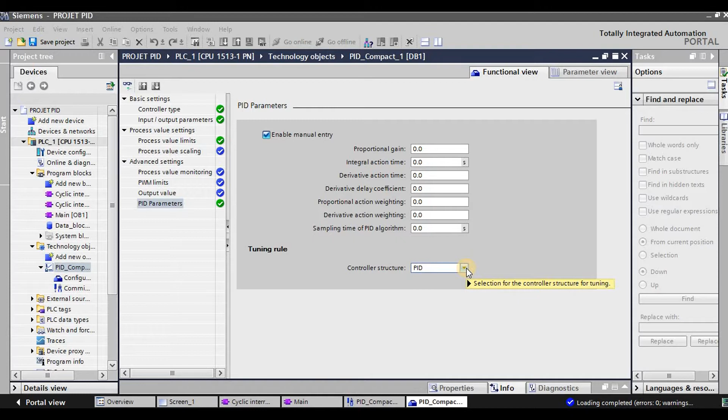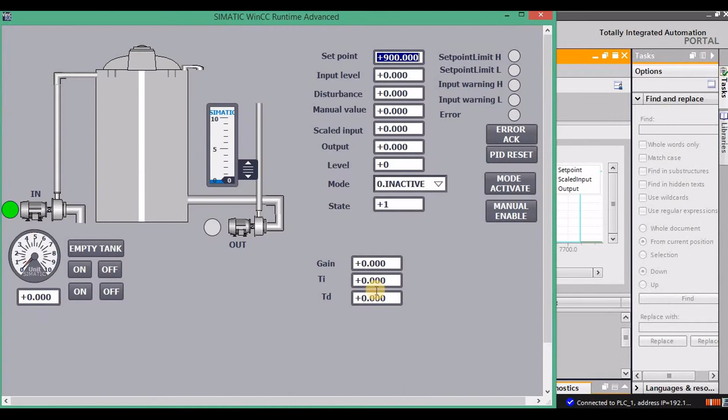Now the pre-tuning has started. Now the pre-tuning has finished. Now we'll check the PID parameters. The gain is 9.4 and TI is 2.4, TD is 0.42.

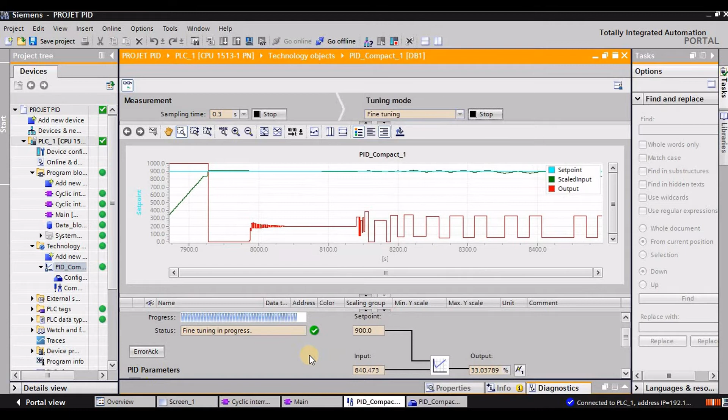Now we will fine tune the system. Now the fine tuning is finished and the status is system tuned. Now we'll check the parameters. Just change it to proportional gain 1 and the integral time 11 and derivative action time 2.5 seconds. Now we'll check the system.

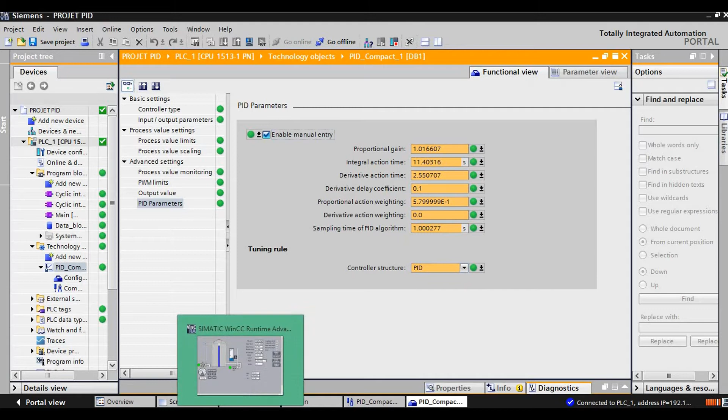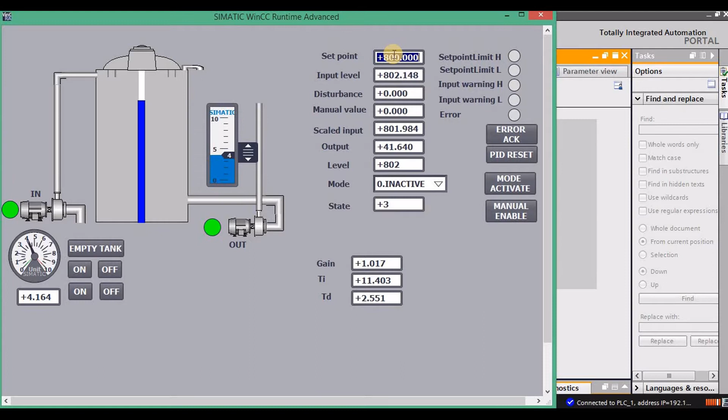Now I have increased the output flow. We will check the stability of the system now. As you can see, now the system is stable. Now we will try to lower the set point. Now you can see that the set point is almost reached. So that's the PID controller.

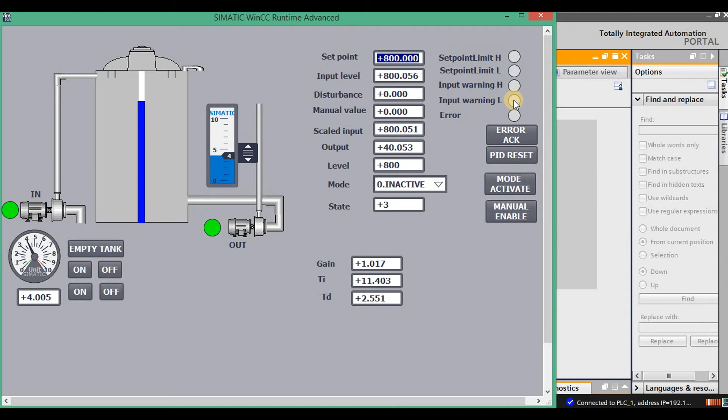Now we will check the warning lights: set point limit high, set point limit low, input warning high, input warning low. For that I am going to use this PID controller itself, and after watching this we will wind up this PID and SCADA side of our project. For setting up the warning system, we have to change some settings in the configuration window.

We will change this process value high limit to 980. That means even though the capacity of tank is 1000 liters, we don't want to fill the tank beyond 980 liters. And in the lower limit we will put 30. In another way we can say that if we put any value beyond 980 or less than 30 in the set point field, there will be an alarm.

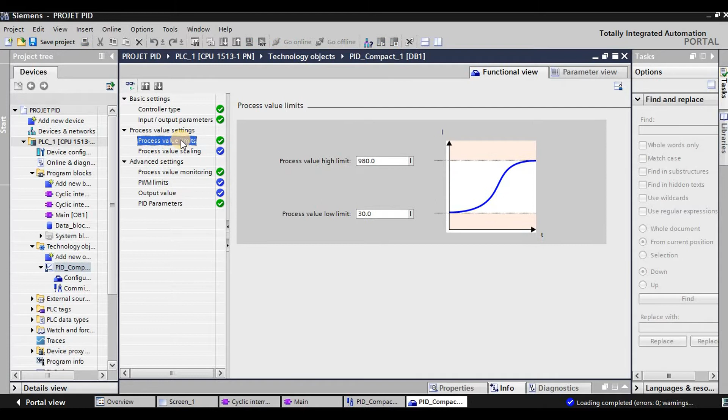Now we'll look at process value monitoring. We will put warning high limit to 950 and warning low limit to 60. One thing to notice is that the warning high limit should be less than this process value high limit, and warning low limit should be higher than the process value low limit. So if the liquid level is less than this, there will be an alarm, and if it is beyond this, there will also be an alarm.

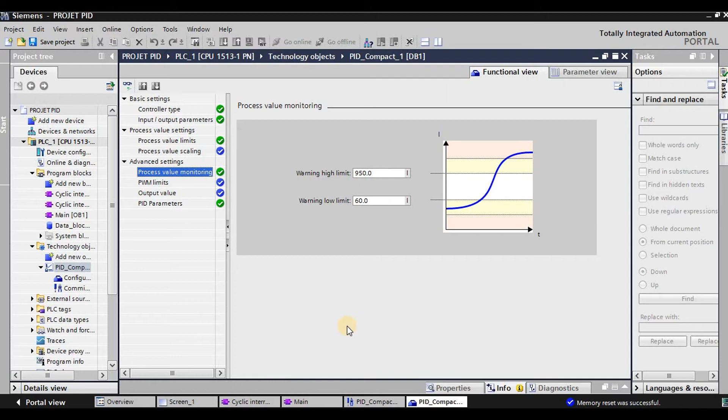Now we will upload these parameters to the PID. Now we will upload these values to the PLC and we will run. Then we can see the warnings and errors during this process. Now I will start the main pump. As soon as I start this pump, there will be an alarm at the set point limit low, because now the set point is 0 and we set the set point limit low alarm at 30.

See, there are two alarms, set point limit low and input warning low, because the set point is lower than both of them. Now we will put a set point. Now the set point low limit alarm has gone, but the input warning low is still on because the level is still 0. As the process starts and goes beyond 60, this alarm also will go.

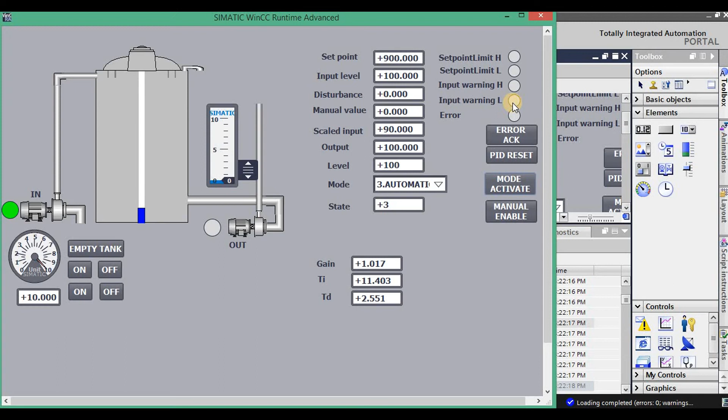Okay, now the level is 70 and the alarm is gone. Now we will wait for the level to reach the set point. Now the level is stabilizing. Now I am going to set the set point to 990. As I enter 990 set point, the high alarm will be active. See,

and as the level goes beyond 950, the input warning will also be active. As the level goes beyond 990, the error light will also be active. Then we will change the value back to 900. Now the error will go. So that's the warning system in this PID block.